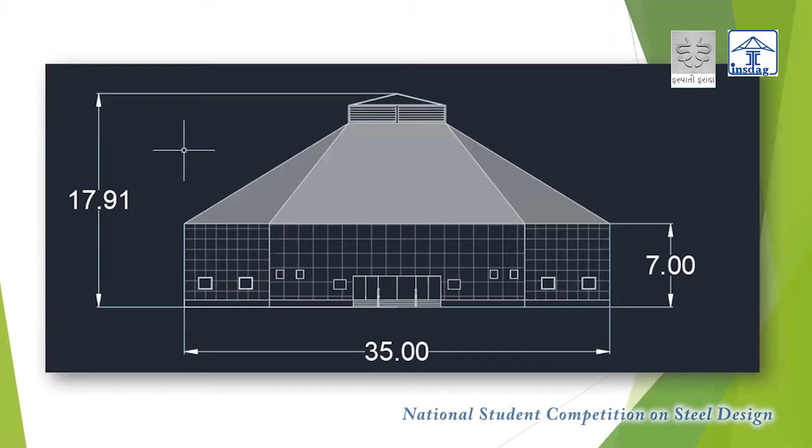The image on the screen is how the proposed building would look like. In the pandemic situation, with the rise in COVID cases, we needed a quarantine center for the containment of all the potential carriers. We have proposed a steel structure that would act as a quarantine center, which can be constructed quickly as well as economically. Once the pandemic is over, it could serve as a multi-purpose hall, an indoor sports complex, and even an art gallery. Taking into consideration the requirements, we have tried to provide the best possible structure which would serve as a comfortable and safe shelter for the people.

The parameters of the proposed building are as follows. The site location is Kolkata, West Bengal. The area of the building is 1750 meters square. It has a length of 50 meters, a width of 35 meters, and a height at the ridge level of 17.9 meters. It has a roof slope of 23.5 degrees.

The minimum eaves height provided is 7 meters. As per IS 875 Part 3, the basic wind speed at a 10-meter height chosen is 50 meters per second, and the roof live load assumed is 0.75 kilonewton per meter square.

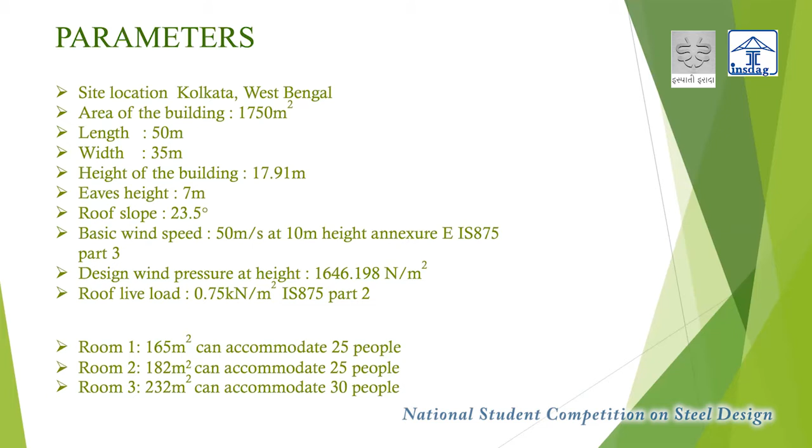There are 6 wards in the quarantine center. Ward 1 and 2 have an area of 165 meters square, which can accommodate around 25 people, taking around 5 meters square per person since it is a quarantine center and people need to stay at a safe distance from each other. Wards 3 and 4 have an area of 182 meters square and can accommodate around 25 people. Wards 5 and 6 have an area of 232 meters square and can accommodate 30 people.

The structure has a total span of 50 meters with temporary partitions for serving the purpose of quarantining the potential carriers as well as providing a comfortable shelter for them.

We have given an octagonal shape to our building because while being spacious, it also adds to the aesthetics of the structure. This shape also proves useful as a multi-purpose hall and for indoor sports events since the partitions are detachable. The high height of the structure facilitates heat management and also gives enough height to provide the required slope for rainfall. The skylight with huge louvers is provided for the ventilation process as well as for natural light.

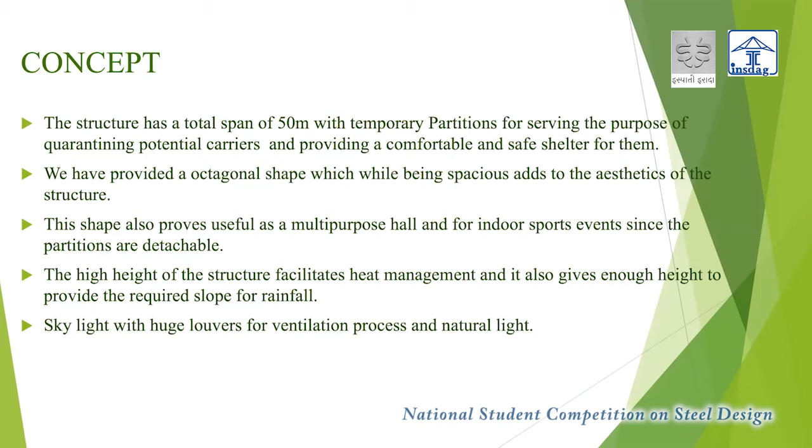The advantages of the proposed building are the provision of detachable partitions so that they can be shifted as per convenience and use. The food counter is provided at the center, so it is accessible to all the rooms faster. There are 6 wards for minimal contact and easier management. Each ward has a toilet as well as toilets for differentially abled. There are enough windows in each ward for ventilation and natural light.

Skylight is provided for natural lighting and aesthetics. Roof louvers are provided for ventilation, as well as we have made a provision for rainwater harvesting as Kolkata lies in a high rainfall region.

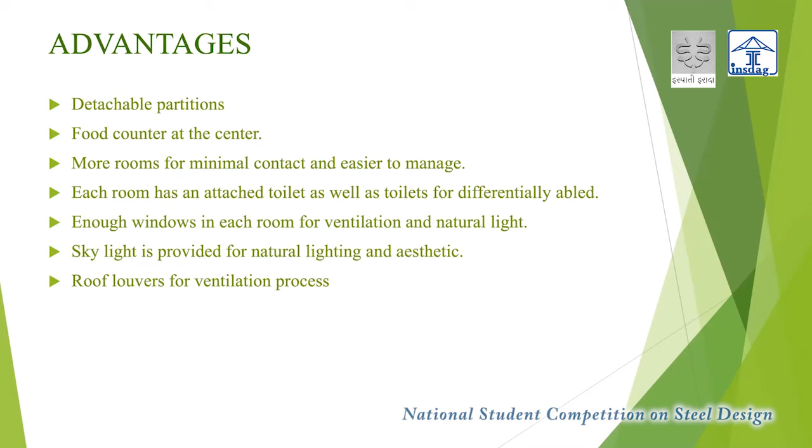Yes, thank you, Natika. So moving on to the special features of the building, we have provided automated doors, keeping in mind the COVID restrictions for minimal contact. Automated doors open automatically on sensing the approach of people, thus eliminating the need to touch the door to open it. This door leads to the sanitization chamber.

Once the person enters the building, he is led into the chamber, which is fitted with automated sanitizers on the walls, which will provide a uniform spray on the person. Also, there is a thermal detector which will monitor the temperatures. So using such automatic doors would really help at a quarantine center as it will ensure minimum contact. This is provided to ensure the sanitation of people before entering the center.

Moving on to skylight, it has been provided for the purpose of daylighting and ventilation. Skylights are located on the roof, so they can result in unwanted summertime solar heat gain and wintertime solar heat loss. Our building is also equipped with an 8 by 8 skylight of laminated glass set on MS frame.

Let me tell you some benefits of using skylight. Those are adding natural light to our spaces, letting in fresh air and better ventilation. It also saves energy costs.

Each ward is also fitted with an emergency switch, which is connected to the security cabin, ensuring rapid action for different emergencies. The building comes equipped with ramps for the 3-meter main entrance, and we have provided a mid ramp of 1 span, helpful for differentially abled people and also for transport of rolling equipment.

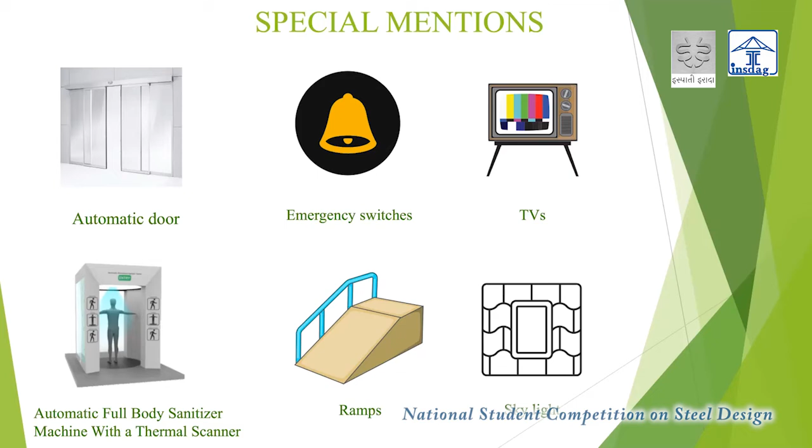Now moving on to the major part of the presentation, the load on the structure. I've represented some typical loading of the structure in these slides. The following slide depicts the earthquake load on the structure in X and Z direction.

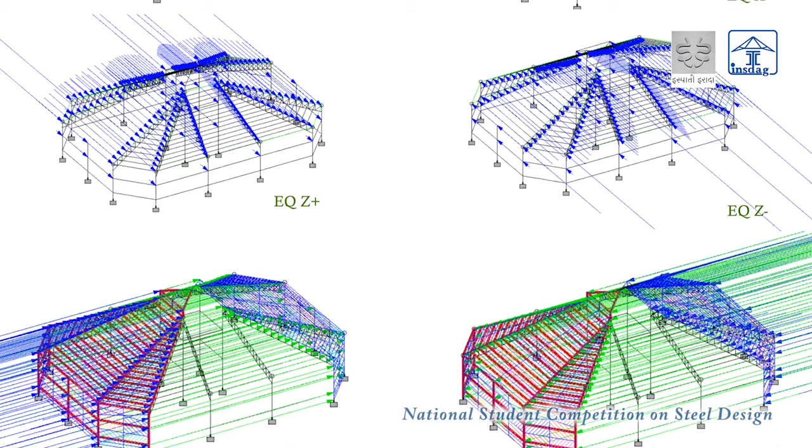These are some screenshots from STAAD Pro, which we used to depict the wind loads, also in X and Z direction. For the analysis part, we have also given the live load and temperature load case, and also shown the self weight. Live load we have taken as 0.75 kilonewton per meter square.

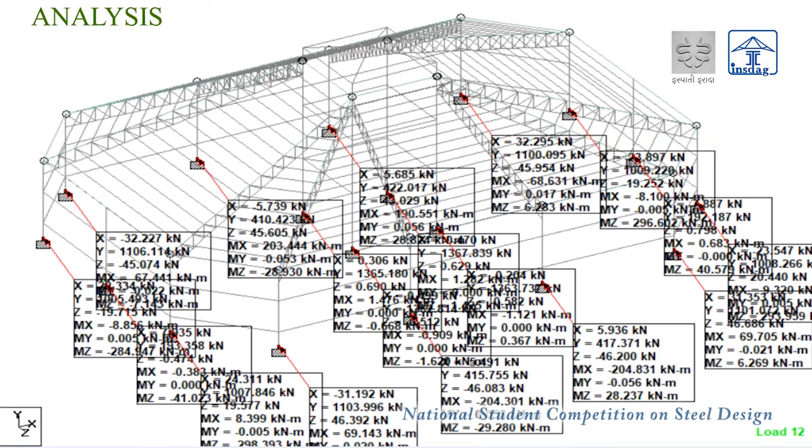Moving on to the analysis part. This is a representative figure from STAAD Pro of the analysis output of the result. Overall responses of the structure in terms of bending, shear, and axial force have been depicted in the following slides.

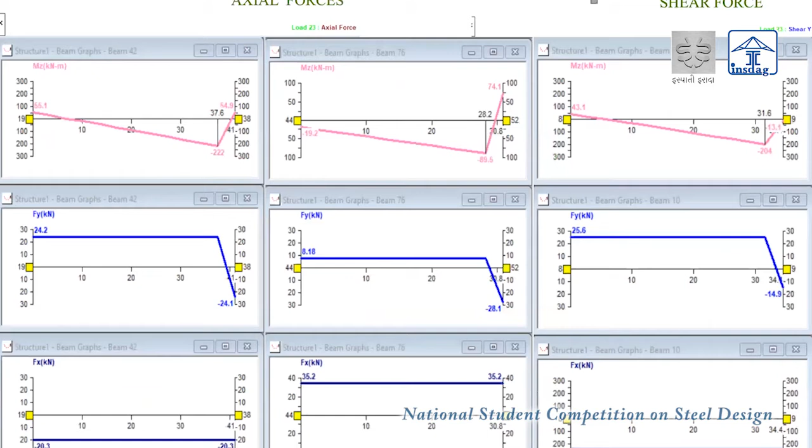The first figure shows the bending moment, the second gives an idea about the axial forces, and the third represents shear force. Individual members have been analyzed and designed accordingly, as mentioned in these slides. These are some typical individual responses of specific beams.

Over to my teammate Amog, who will brief you about the step-by-step design.

Hello everyone, I am here to brief you about the step-by-step design. Going towards the beam, we have designed all structures using IS 800-2007 code. We used an Excel program in order to get the results. We have designed columns accordingly, and all the columns are designed as short columns.

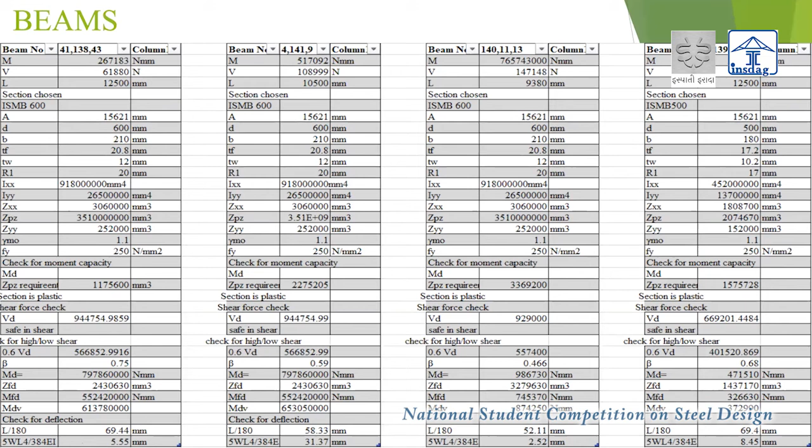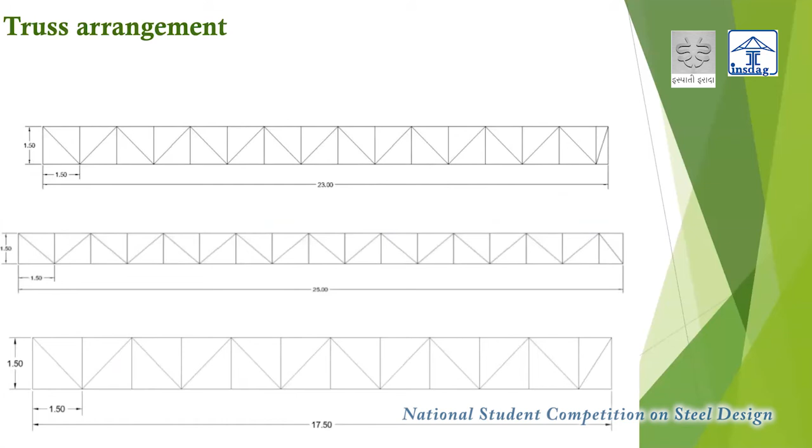Going to the truss arrangement, the truss arrangement is chosen so as to minimize the size of the sections, avoiding increased rigidity and self-weight. Tubular sections are used for this purpose.

Going to the slab base, the foundation adopted for column structures is a typical slab base due to less span, which may be due to the less span or column spacing. Slab base is sufficient to serve as footing. Now over to my next teammate, Netra Narkand.

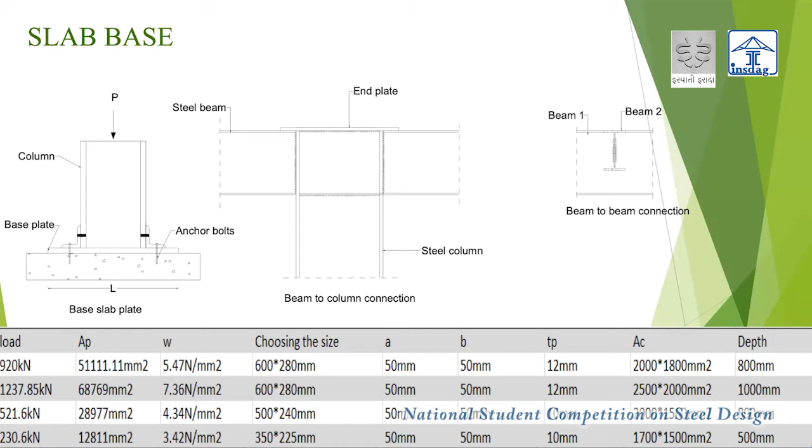Thank you, Amog. Now I'm going to brief you about the remaining design members. Purlins: we have designed purlins as continuous beam members resting on rafters, ranging from 1.5 meter to 21 meters. The maximum section chosen for that span is ISMB 600, and the minimum is ISMB 300. The maximum bending experienced by purlins is 6,391 Newton meter, whereas the maximum deflection experienced by the purlin is 10.67 mm.

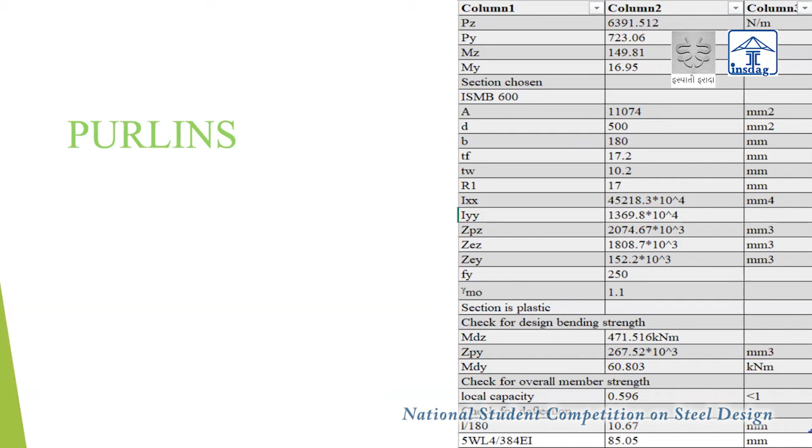Joints: this is a typical picture of a joint designed under the beam column junction. So now over to my next teammate, Tejas.

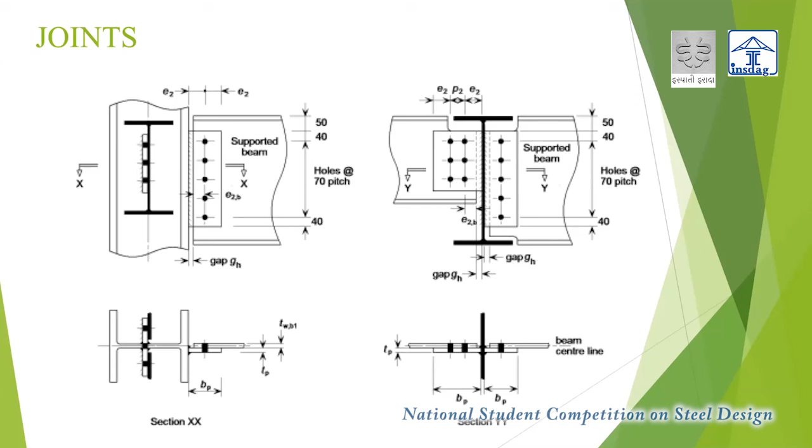Now we'll be looking at the drawing of the plan. This is the elevation view; we have provided a maximum height of 17.91 meter, and the eaves height is 7 meter, whereas the front span is 35 meter of the building. The entrance has been given as 9 meter.

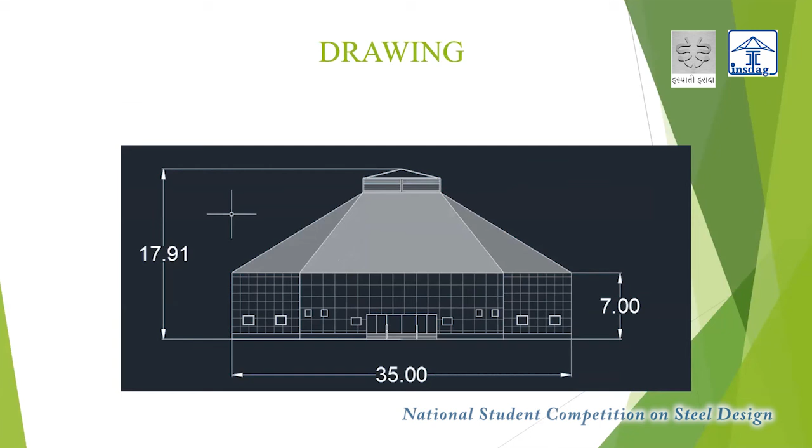Now Amog will explain about the bill of quantities.